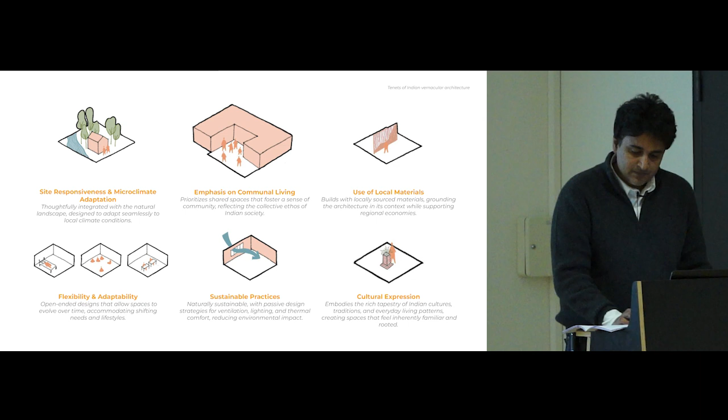Just to encapsulate this, we looked at the vernacular architecture of India, and one finds commonalities. The way one approaches vernacular architecture is through site-responsive and microclimatic adaptation, emphasis on communal living, use of local materials, flexibility and adaptability, sustainable practices, and cultural expression.

To consolidate all these ideas into one space that is an identity of Indian architecture, there's the courtyard. The courtyard in Indian architecture is much more than a structural element; it is the beating heart of the home, an inside-out city, what I would call it. The central space draws life inward, where the walls embrace and protect, creating a world within the world, a sacred enclosure that opens to the sky. In these open cores, architecture becomes poetry, where each courtyard is a canvas for the play of light, air, and life itself—a timeless symbol of shelter, community, and the intimate bond between people and place.

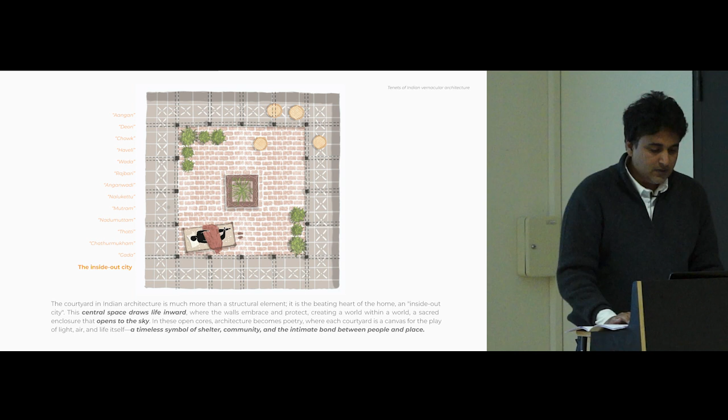As you see in India, the courtyard is termed with different terminologies—some call it an aangan, a chowk, a wada, an anganwadi—and that varies because of different geographies and different cultures set in those geographies.

In India, the common Indian aspires to desire their own house. It holds deep cultural and emotional significance in a rapidly developing yet complex economy. Homeownership is more than a transaction, it is a life milestone. A house in one's own name symbolizes not just financial success, but personal triumph, making the moment one feels they have truly made it.

A home in India embodies far more than just physical shelter. It stands as a sanctuary of comfort, a testament to long-sought stability, and a visible marker of social achievement. For many, it is the culmination of years of relentless hard work, sacrifice, and aspiration.

It represents not only the fulfillment of individual dreams, but also the collective hopes of family and future generations. But the truth is not so great. So when the average Indian embarks on the journey of finding a home filled with aspirations of comfort and fulfillment, they're often confronted with a stark reality.

Cramped matchbox-sized apartments are the norm, offering views of not more than adjacent buildings, often located in poorly developed areas with limited access to essential amenities. And these buildings are often nothing more than repetitive, soulless structures designed with no greater purpose than to provide a basic roof over one's head.

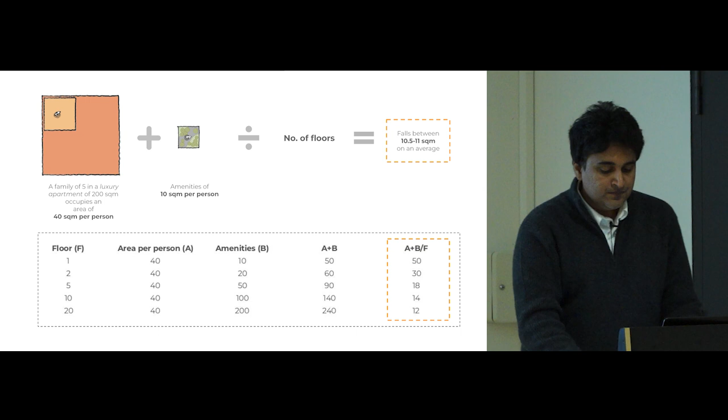So regardless of the size of the house, if it's 25 square meters or 200 square meters, the curve flattens between 10.5 to 11 square meters per person. So that is the standard that we thought could be applied when we start planning, like how many people could inhabit a particular site.

So therefore, for a site of 10,000 square meters, the maximum population will be 10,000 by 10, that is 1,000 people or 200 families. So this is the master plan of the affordable housing where we finished one building, and the second building is yet to get built.

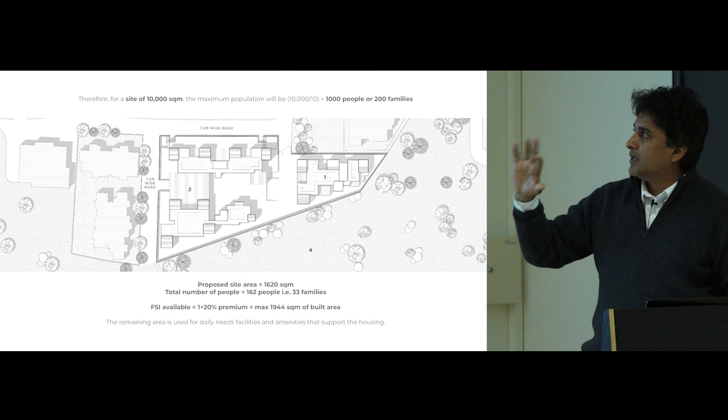But as a formula, we applied it to this site and said we can have a maximum of 33 families living in this site, and the remaining area we can use for open spaces, amenities, and so on.

The next framework is space. Space is the most valuable and costly element in construction, making it essential that every square meter is utilized with precision and purpose. Efficient and thoughtful use of space ensures both functionality and value, maximizing the potential of every area within a structure.

So when we started looking at space, the constant question was how do we arrive at a form that is more economical. We started looking at the basic attributes of a form, like the area and perimeter, to see how that could give us a solution for an economical form. Comparing a square and a rectangle enclosing the same area, we derived that a square requires a lesser perimeter for construction, making it a more economical form. So that's why we thought a square can give us a more affordable form in terms of construction.

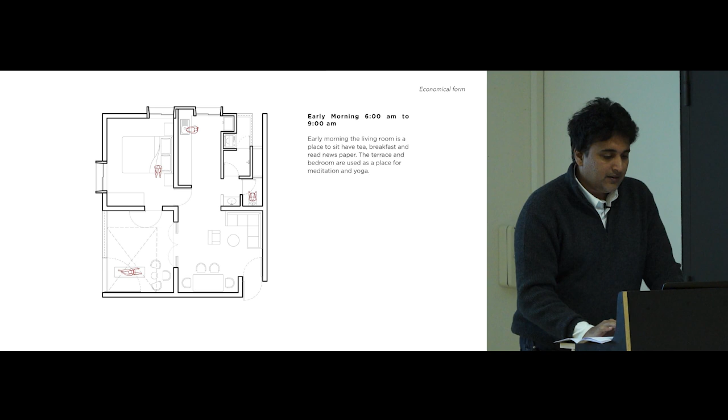We then started analyzing how this single unit can be dynamic in terms of its usage, at different times of the day. In the early morning, the living room is a place to sit, have tea, breakfast, and read the newspaper. The terrace and bedroom are used as space for meditation and yoga. These are based on Indian lifestyle patterns, what people aspire for.

From morning 9 to 12, the living room along with the terrace is used as a study area where one can sit, write, and think. In the afternoon, the spaces are effectively used as sleeping spaces, and then as dining space during lunch and dinner. In the evening, the living room is used for meeting family and friends, and the terrace for kids to play. These spaces become greatly active during gatherings and festivals.

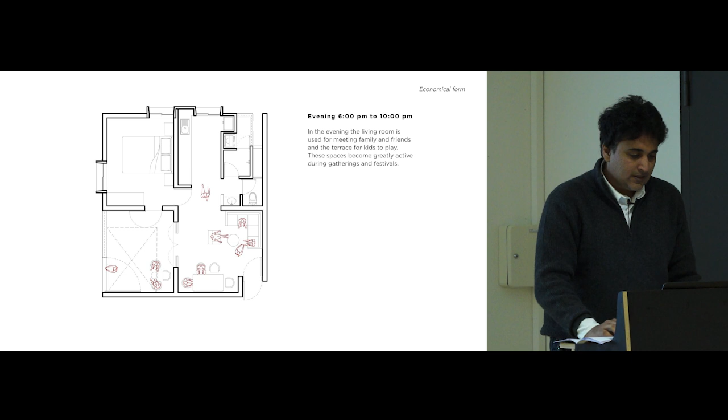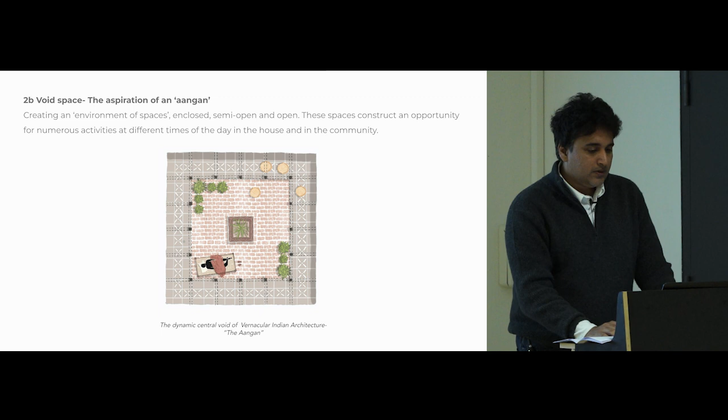So this dynamism in space came through the architecture of the courtyard, and how it is used effectively at different times of the day. This is the aspiration of many Indian families, that they would aspire to have a house that is so dynamic in terms of its usage.

The void spaces generate these courtyard typologies that one can look at. But based on the activity and living patterns, the L-shaped typology is the one we have used for this particular project.

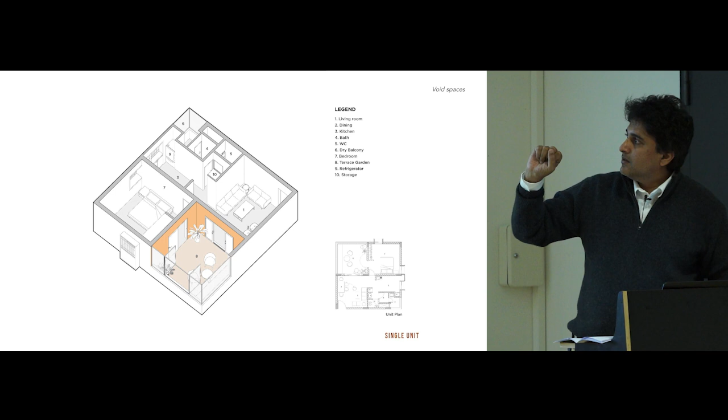This is the L-shaped construct around the terrace garden. The terrace garden effectively performs more like a passive light and ventilation device, which ventilates the rooms on either side. These are some sectional diagrams that give you an understanding of how the sun enters the rooms during the equinox and solstice.

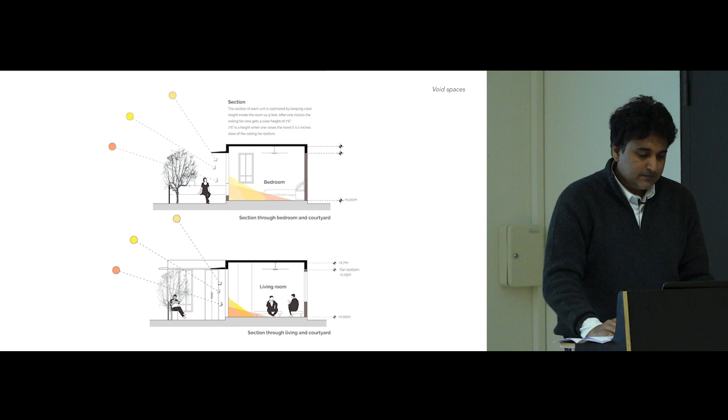This can be seen inside the units that are built, and the space then blends seamlessly between the inside and the outside. These L-shaped units are arranged in a plan where the open space interlocks with the neighboring units, increasing the possibility of expansion and incrementality between the two. This is the floor plan of the apartment, where you can see the open spaces interlocking with the neighboring apartment, and one can even connect to that apartment through the open spaces.

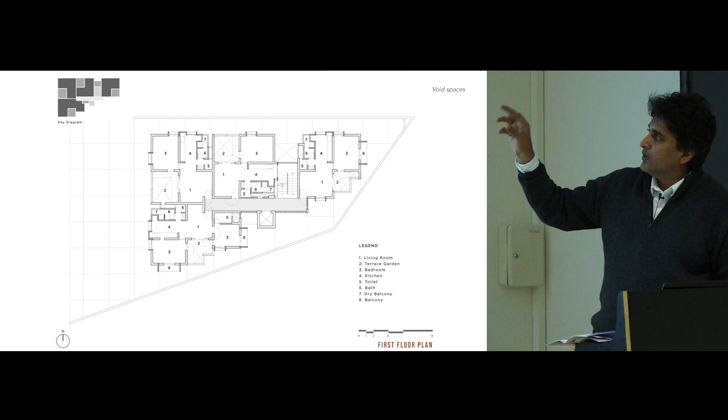This diagram is further translated into a floor plan with proper dimensions. As you see, all the service cores are very compact in each unit, forming the kitchen and toilet cores, while the rooms are pretty much open, overlooking onto the terrace. The new floor plan is stacked upon one another, consisting of 13 single bedroom units and 3 two-bedroom units.

I feel this diagram is very scientific in the sense it consists of highly efficient living patterns of a single unit that populates itself to form a community of open, semi-open, and enclosed spaces for use at different times of the day.

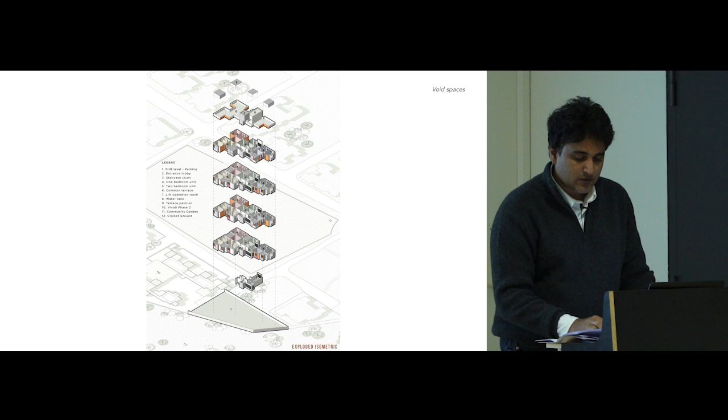The central challenge in housing lies in creating spaces that are both suitable and evoke a true sense of home, places that feel personal and embody individual identity. Architecture must balance adaptability to serve a diverse, often anonymous clientele. This can be accomplished by offering a flexible kit of parts that allow for various permutations and combinations, enabling space to evolve and adapt over time to individual needs and personalization. This approach ensures the home remains dynamic, shaped by its inhabitants.

So going ahead, we looked at the idea of the space and how it can be used dynamically, and the second attribute was the kit of parts that can add value to the space. The first is the ambiguity of usage, the open plan, which functions based on different times of the day with different activity patterns. Then there is the temporality in space with movable partitions, climate controls, add-on spaces, add-in spaces, and the personalization of spaces.

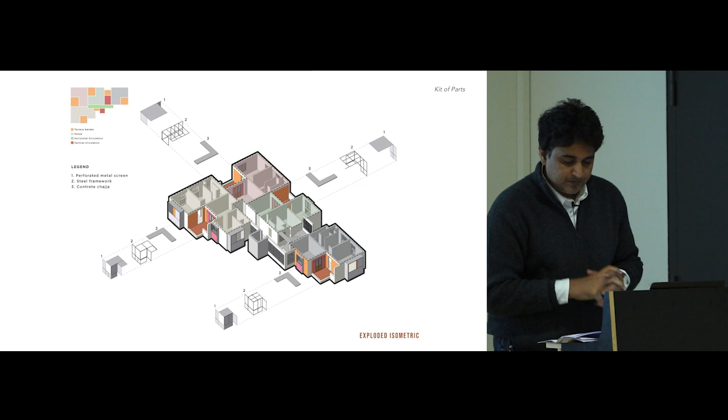The first set is the windows, which form the major design language of the facade. These are categorized into 6 types. Type 1 is a double box window for kitchen and bedroom, and the box below is a place where one can keep the outdoor unit of the AC. The other two are full height windows which open into the living room with a railing.

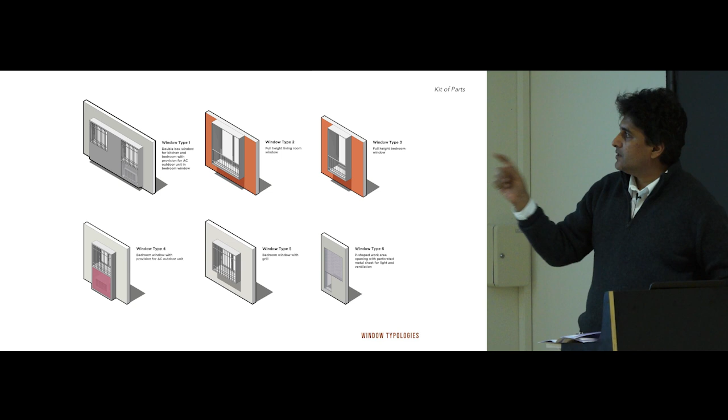Type 4 is again a bedroom window with a provision for AC outdoor unit. Type 5 is a normal window which can be attached to any room without an air conditioner outdoor unit box. The last type is a P-shaped unit along the service duct, used for accessing the service ducts.

I'd like to show you what went into making these windows possible on site. We went through a series of working drawings that would set up these windows in concrete. Later, the exercise was only to get the sliding window fixtures and put them in place. If you see the edge detail, it's an L-shaped notch that receives the window grill.

Window grills are a thing in India, because no client will want their houses without window grills. Yeah, it's kind of a safety parameter, can't help it. I mean, you'd like to design houses without grills, but I think it's not possible.

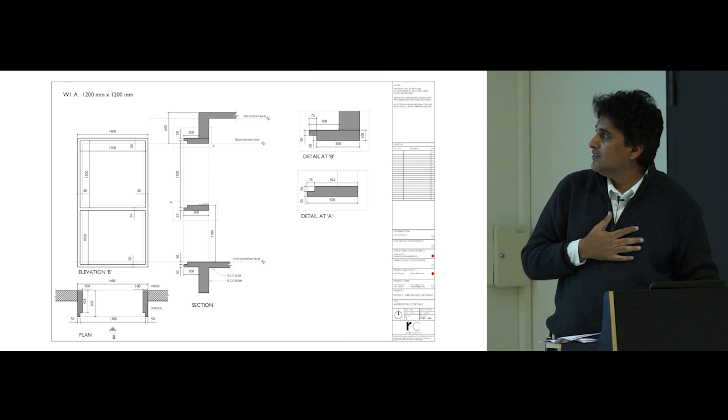Then you see this other window type which has a box below, primarily designed to keep the outdoor unit. It should not stick on the facade. In India, if you visit, you'll see a lot of buildings having AC outdoor unit boxes on their facades just hanging there. We didn't want that to happen, so we have this detail where all the outdoor unit boxes are taken care of.

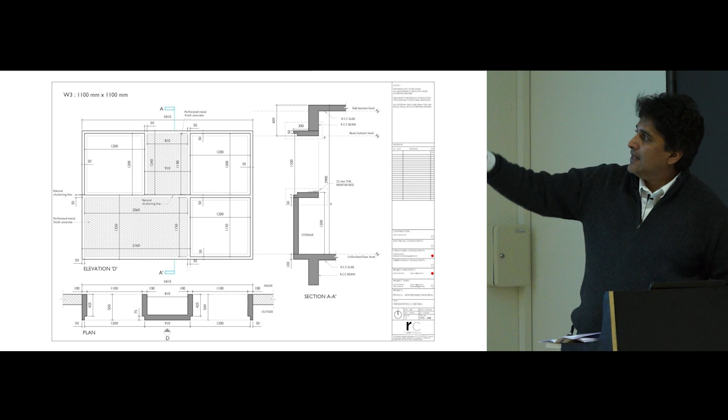This is a combination window between a bedroom and a kitchen. The right side is the bedroom, and on the left we have the kitchen window, which has an L-shaped storage that I can use as storage from the kitchen.

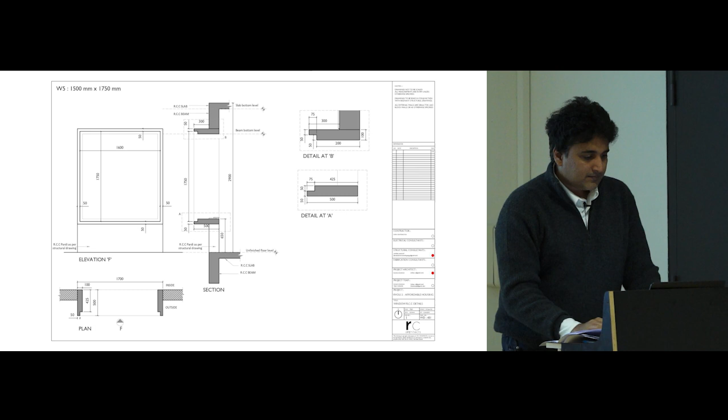And then these are again these long windows that open into the living room or also open outside on the view. Again, a long window with a wider dimension.

So that was the one set of kit of parts. And then these are the concrete screens that we customized, and these screens are primarily to seal the common areas, the passages and the staircase landings and so on. So we have 3 types for this - type A, B and C.

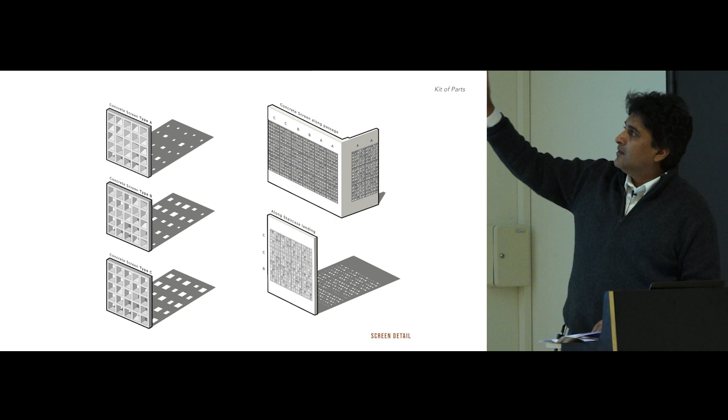So basically type A has more of the smaller openings and less of larger openings. B has a combination of both, and these are the working drawings that we produce, and you can see the section below of how they modulate.

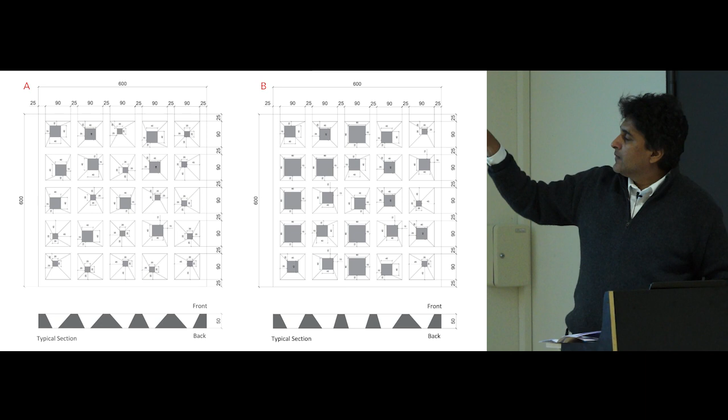And C has a lot of bigger size openings. The reason to do this was based on the direction from where the rain comes, or based on the direction of the sunlight. We could modulate these panels and create the openness as we desire. And the section gives you an idea of how they are stacked upon one another to form the screen.

And these were all locally manufactured. We did not go to any special factory. It was crafted in a small lane in Bombay where, I mean, you can see it is as primitive as it could be. So this man, he made these 3 molds by himself. It took him a little time to understand what he had to make, but once he understood, he made it so perfect that it was as good as the drawing.

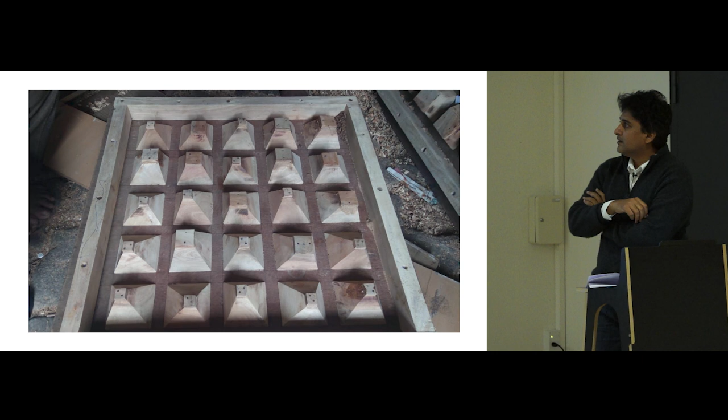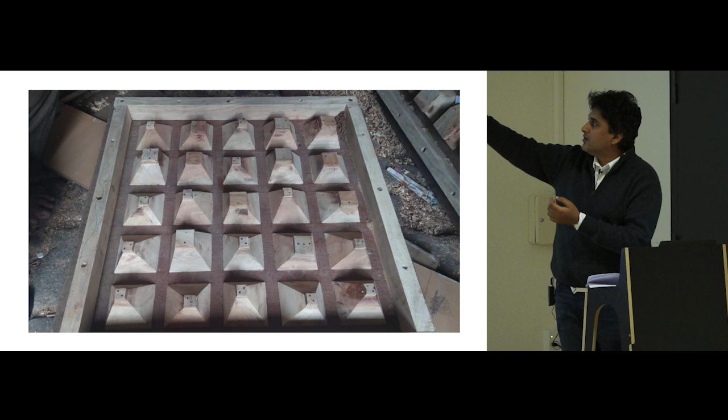So essentially how it works is, this is a wooden mold, and then the concrete is poured on this, and all the negative spaces get filled with concrete, and then you can manufacture any number of panels out of it. And then along with concrete, we have some metal rods going in the X and Y direction, which hold these panels together.

The next set is the balconies, which are attached to the edges, and these spaces are the extensions of the bedrooms. So at night, if one even wants to leave the bedroom door open and have this screen as a layer of protection, one will enjoy a nice breeze into the rooms. The climate in India is very different compared here - here we cannot do that because it's very cold. So this is completely contextual.

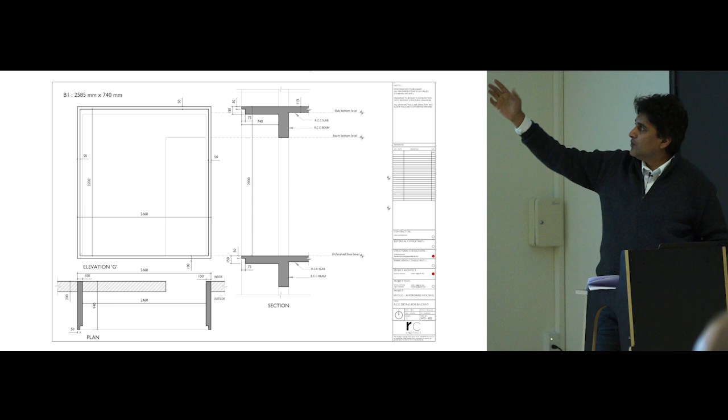So we have 2 types of balconies - one is wider, one is a little shorter. And that's how these elements appear. So they have an operable shutter, so one can even open it, leave it open for security, or it can be closed - it has many possibilities. And it also adds a great value to the facade.

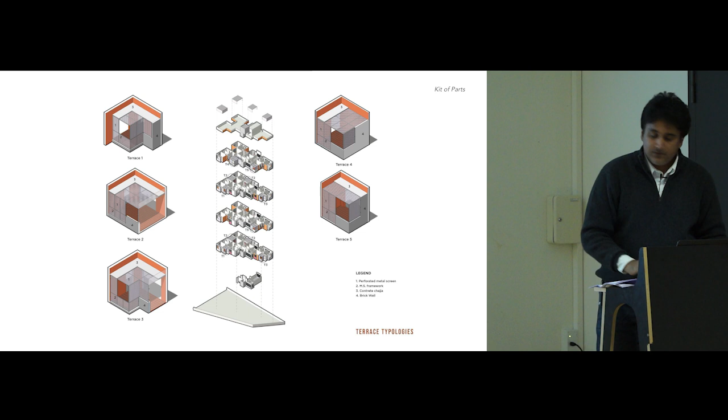And another kit of part are the terrace gardens. The terrace garden, they kind of form a great part of the facade. As you see, there are 5 types of terrace gardens, each with a different set of modulation of the perforated mesh. And each terrace has 1 square opening that allows you to open the shutter and look outside, and not feel as if you're in some sort of a cage.

Yeah, and those are those L-shaped terraces. The facade's metal shutters open and give you a view outside. Yeah, that's how the space looks like, from the inside it forms.

This is a very small space, must be around 10 feet by 10 feet, around 100 square feet. But for affordable housing, it adds a lot of value in terms of the size of the house, because all these houses are roughly 350 square feet, that is 35 square meters approximately. But this added space allows one to do a lot of permutations and combinations with this open space and use the indoor space accordingly based on different times of the day.

All the passive lighting and ventilation happens from here. The beauty of this plan is from the living room you can see this space, and from the other room also you see that space. So at a time you feel you have two of these spaces because you see the same space from two different spaces.

On the left-hand side you can see the terrace boxes coming out where the two girls are standing. We used a perforated mesh to enclose this, and the reason I took a detailed shot is the building surface is an opposite of what a mesh is—it's like an interlocking surface pattern with each other, and that's how the terrace appears to be. This kit of part adds great value to the facade, creating interesting volumes.

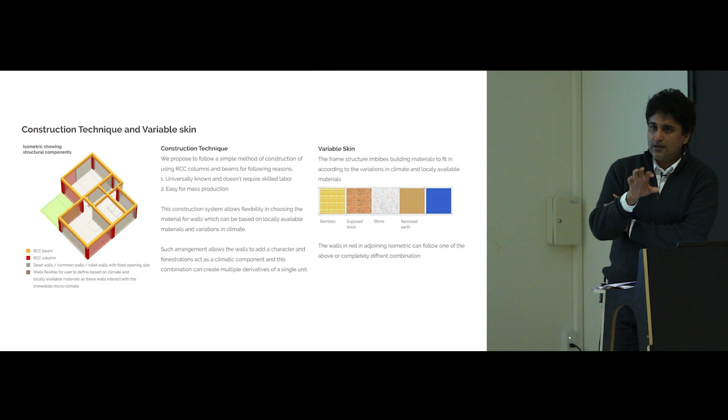The construction technique we used here is very simple—RCC beams and columns, but the flexibility is that one can use any material for the walls, for the infill, based on the context and locally available materials. The reason was this site was in a remote area, so we did not want to experiment with the construction method, something that the local labor could understand how to build. That was the primary guiding factor because one has to construct this building.

The third part of the framework is the circulation and the community space. This is very typical of Indian culture—in olden days, community spaces were used to reinforce the housing to create external connections, and they always embedded a sense of community. A child would never be alone at home.

A relative or neighbor was always around to help one another. The pungent smell of tasty food, chit-chatting through spaces, gathering on the common terrace during power cuts—all encourage one to partake in the everyday life of another in the colony.

Going ahead, I would like to show you a short film to reinforce the idea of community spaces. This is a film made by Urban Design Research Institute on affordable housing, built by the Maharashtra Housing and Area Development Authority. The kind of housing they build and what the city is going through—I think one would get to see through this short film.

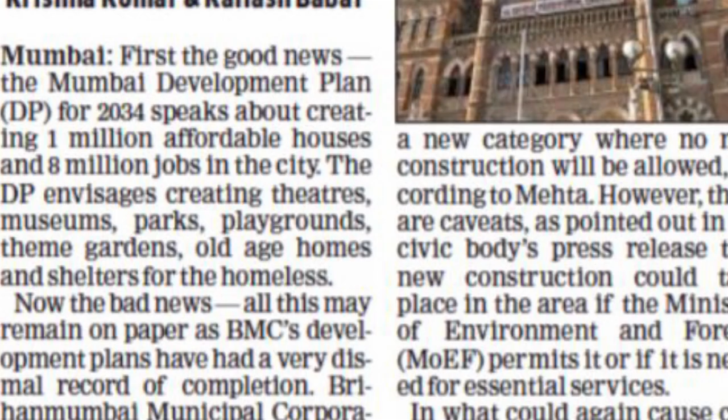The development plan for Greater Mumbai 2034 promises Mumbaikars 1 million houses, 8 million jobs, several open spaces and slum rehabilitation projects. But there is a wide gap between these highly aspirational figures and the reality on the ground, as there are no details on where these houses will be located, how the infrastructure will be, or how they will impact the quality of life.

Is it yet another scenario where, to secure the luxury of a few, the rest will be crammed into densely planned areas as a tick box exercise? This is the case, for example, with SRA developments, where the right to life of citizens is severely overlooked.

In SRA areas, 1 in 10 persons suffers from tuberculosis, and that person may further affect 15 people across the city. This is all thanks to the misleading development control regulations, and it won't be long before Mumbai is faced with an epidemic.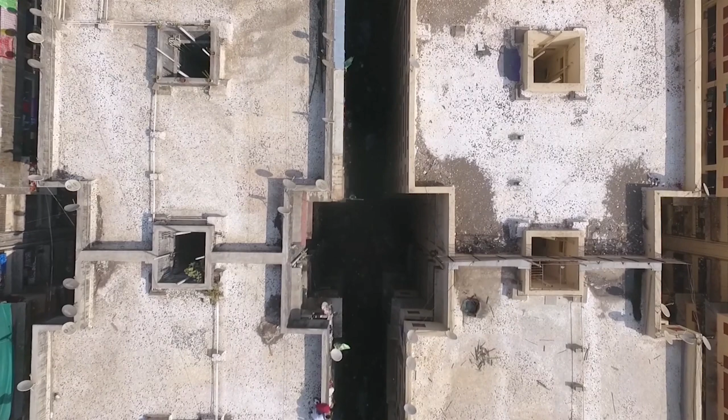High-density living conditions and a reduction of side margins create a heat island effect, which increases the temperature of the neighborhood, making it the perfect breeding environment for the bacteria which causes tuberculosis.

Along with SRA residents, all Mumbaikars are at high risk, given the vast mobility of working citizens across the city's transport networks. What the policymakers aren't telling us is that with such provisions, Mumbai will soon develop into a highly infectious spot for deadly TB.

While the mega plans for providing affordable housing seem like a big relief, in reality, with free housing comes free TB.

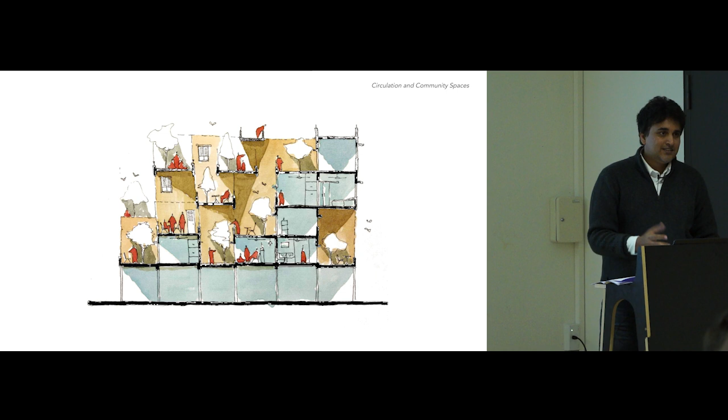So that was a great example of what happens when there are higher densities, lack of light and ventilation, and one compromises on open spaces.

I mean, this is a sketch—in fact, this is the first sketch that we did for this housing. We saw the movie afterwards, but naturally we inclined towards creating better spaces for people.

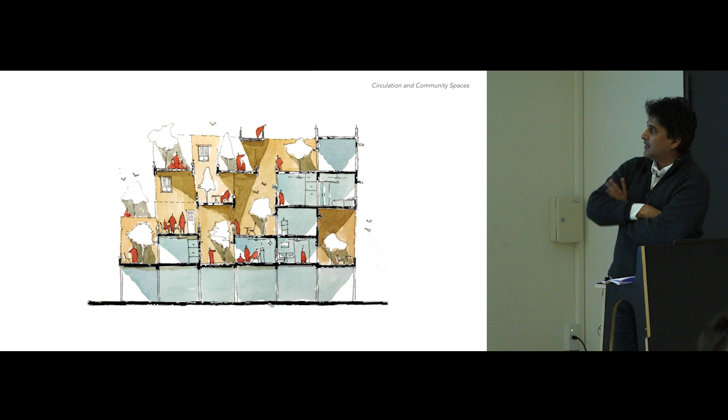So it was always about having community spaces where people can talk to each other, have good light and ventilation, and have a good communal life.

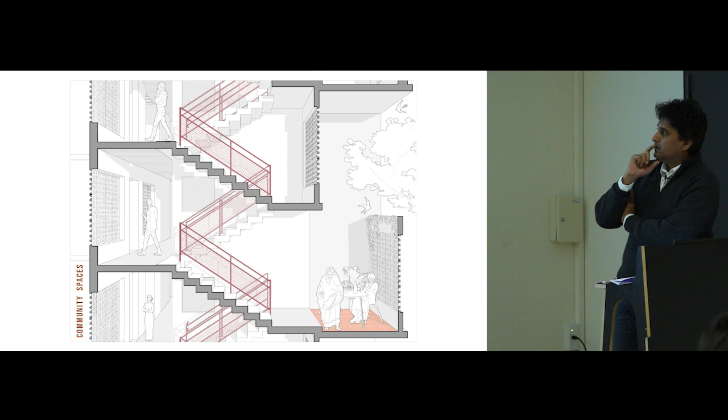And this is a detail of the community spaces—this is a sectional perspective of the project. It's not a big project, it's a very tight housing scheme, but what we wanted to do was have these community spaces scooped out wherever we could.

So here, if you see, the staircase landing is getting extended and becoming a space for senior citizens, or even a space for teenagers or youngsters or kids, or even a place where one can just sit and contemplate.

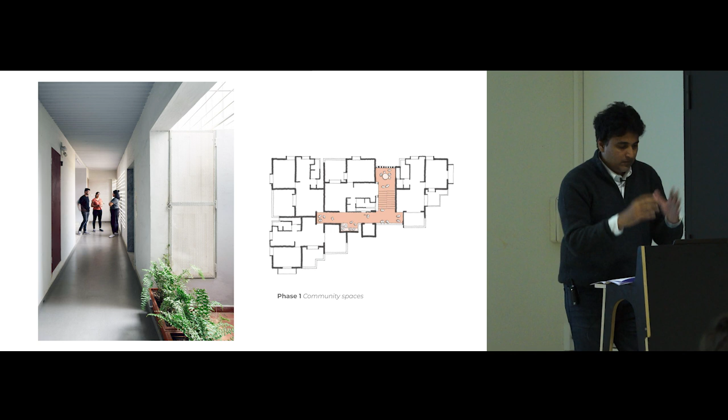And then, as you see, these are the community spaces marked in the drawing, and one can see how well lit and ventilated these spaces are. They're not big open spaces, but they allow for chance interactions.

That's where the staircase gets extended and becomes a place to sit. Or we have these pocket terraces along the pathway, which again allow for another layer of common space.

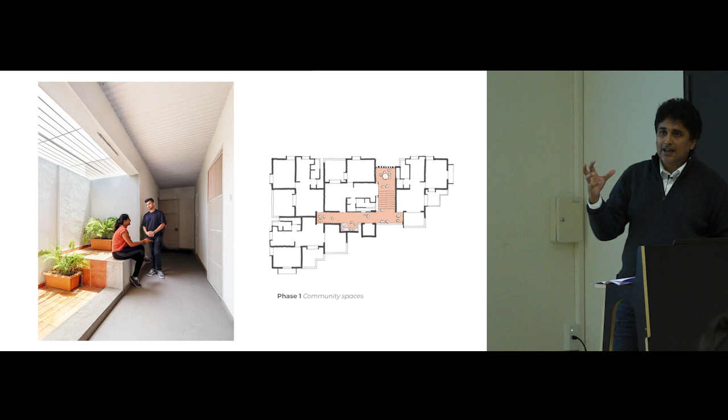And these spaces add value to the affordable housing because, as you see in that film, there's so much lack of accessibility to these kinds of resources that allows one to stay in such very cramped living conditions.

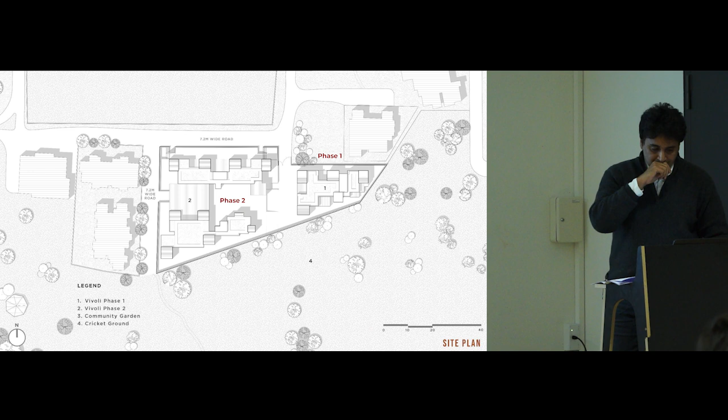So this was phase 1, and I would also like to show you some bits of phase 2 of what we are planning to do. So these are the 2 buildings. Phase 1 is sitting there, and we saw some real-time pictures of it. Phase 2 is yet to be constructed. They're separated by a common access road.

But before showing phase 2, I would like to touch on the aspect of amenities and how community spaces and amenities can go hand in hand.

Earlier I was talking about how the FSI can be subsidized and used for amenities. So amenities play a crucial role in housing, extending beyond convenience to significantly impact residents' quality of life, financial well-being, and sense of community. By offering essential services and facilities close to home, well-designed amenities help reduce daily expenses, promote social interaction, and create a supportive living environment. Moreover, accessible amenities encourage a healthier lifestyle, enhance property value, and contribute to long-term satisfaction and stability within residential spaces. In a sense, amenities are integral to building a sustainable, thriving community within a housing development.

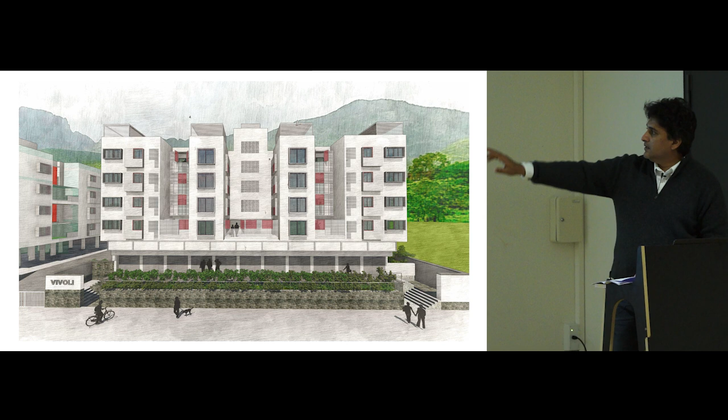So the idea of life cycle cost in low-cost housing, much like the concept practiced in sustainable architecture, goes beyond conventional metrics of construction cost savings, and instead adopts a holistic approach to low-cost housing across a building's entire lifespan and its potential within the urban fabric.

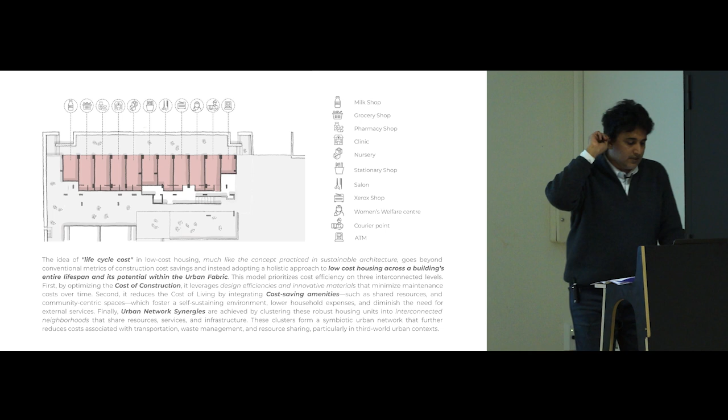This model prioritizes cost efficiency on 3 interconnected levels. First, by optimizing the cost of construction, it leverages design efficiencies and innovative materials that minimize maintenance cost over time. Second, it reduces the cost of living by integrating cost-saving amenities, such as shared resources and community-centric spaces, which foster a self-sustaining environment, lower household expenses, and diminish the need for external services.

Finally, urban network synergies are achieved by clustering these robust housing units into interconnected neighborhoods that share resources, services, and infrastructure. These clusters form a symbiotic urban network that further reduces cost associated with transportation, waste management, and resource sharing, particularly in the third world urban context.

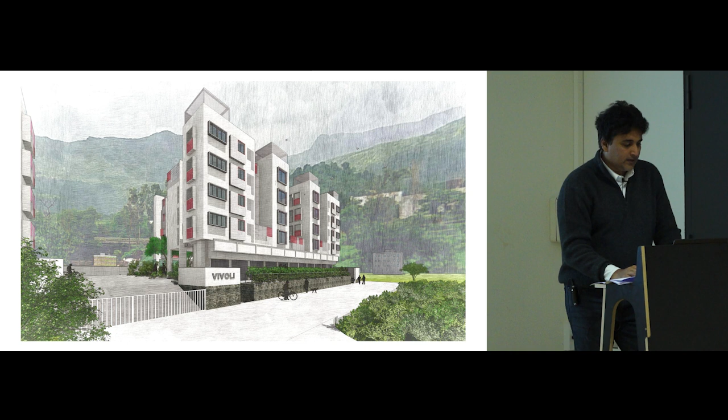And these are some montages of phase 2, and that's the community space where one enters on the ground, and you can see 2 staircase cores that go up. So here we have 2 of such buildings, like phase 1. And then again, we have these community spaces, which I call the inside-out city, derived from the courtyard.

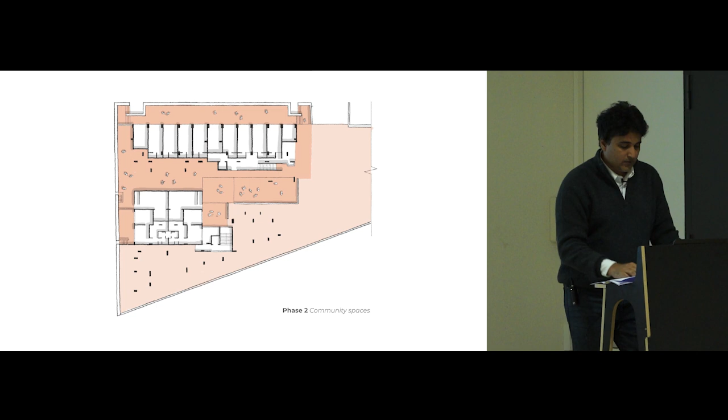So this is the ground floor of phase 2, where these are open spaces for communal life, completely filtered with light and landscape.

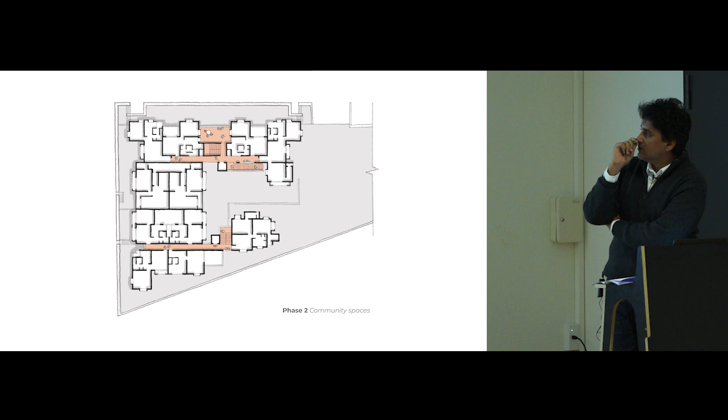Yes, and those are the 2 blocks in the front and the back. On the right-hand side is phase 1, and in the middle we have tucked in 2 bungalows, which are special designs. If someone wants to have a bungalow within this setting, one can easily buy those 2 units.

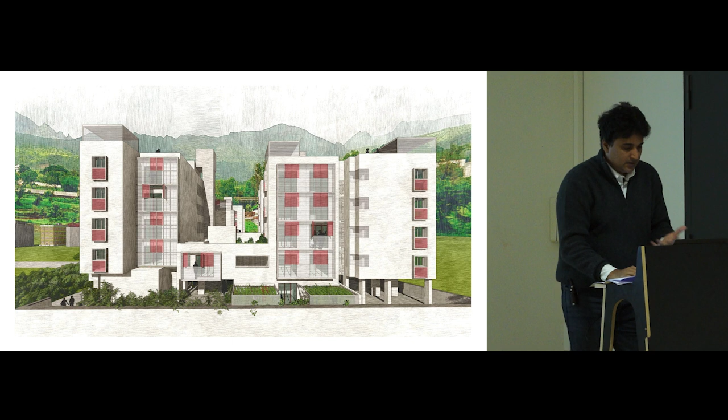And this is the facade on one side, but if you see, this open space goes right across from phase 2 to phase 1 - you see the phase 1 building on the back side.

So as a design aspect, we were trying to create this kind of network where the housing operates like a communication center, which connects with the amenities, which as well connects with the village farmer as well as with the core urban areas. The housing itself becomes a prototype where they can bring all these three components together.

And in India, at a certain level, ITC is doing that. So the farmers get more benefit from this kind of initiative, and they get a better price for their produce when they come in direct contact with the housing communities.

And then I'll take you through some construction images of how this project was realized.

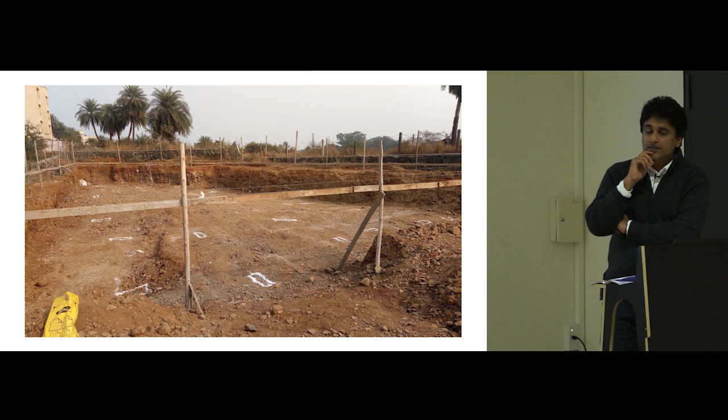This is then marked on the site, and this is a very traditional way of doing it. These days we have instruments like total station and other things which mark the coordinates on the site. But here, since the site was remote, we had to follow a particular method because the contractor did not have all those latest equipments. So essentially we have these wooden planks marked on all four sides, and the dimensions are marked on that.

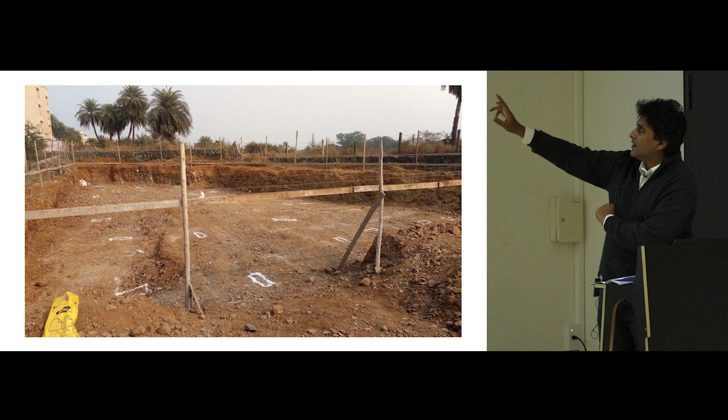If you see, there are these threads going in the X direction and the Y direction that give you the position of the columns, and that's how these columns are marked on the ground in chalk.

And yeah, that is the lift core where the man is standing. It's important to get this right because you don't have machines and you have to depend on people to mark that, and developing trust is the most important thing here. So we have to go several times and check: is it as per the drawing, is it correct, how has it been done.

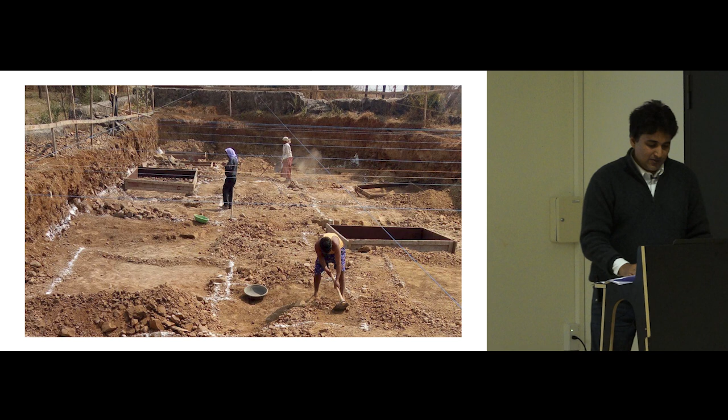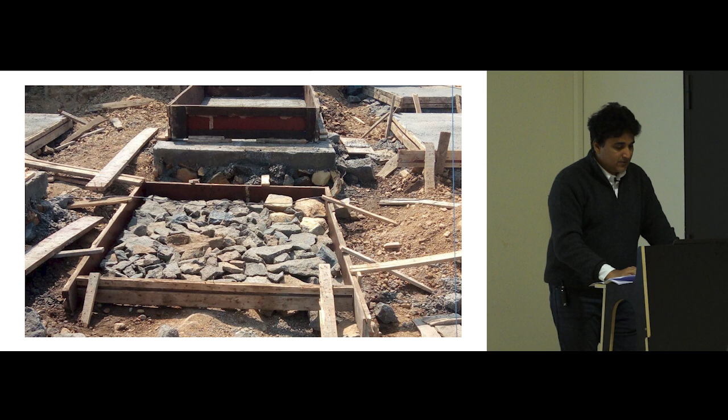Once the columns are identified in the correct location, they start digging the base of the foundation. They dig it and put a layer of PCC 3 to 4 inches thick. First the rubble soling is done, and then they put the layer - this is the kind of rubble soling that is done, and then they layer it with PCC to erect the footing.

So you have a number of platforms created on the ground inside the foundation, which allows the base for the columns.

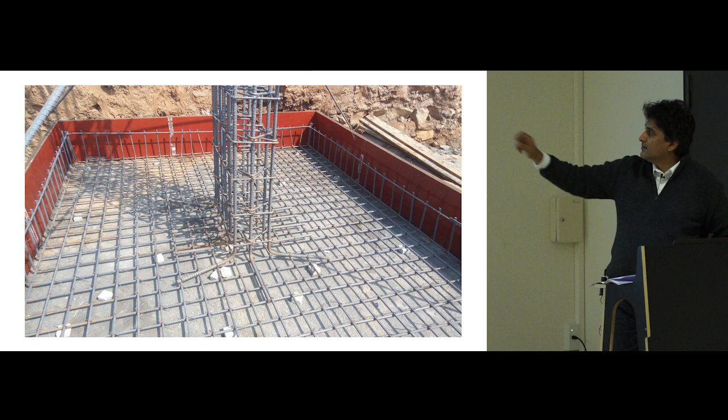And that's how it is tied and anchored with the stirrups. Then you have these small spacers that are kept so the concrete goes below it and settles down. It creates the cover for the footing.

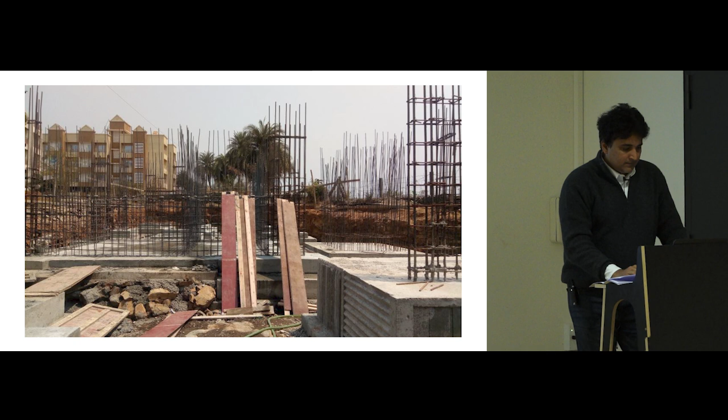An interesting thing we tried to do was create some mock-ups which we wanted to later use as finishes. Here we have used the corrugated concrete shuttering to understand how it will come out with the available resources, which we used later in the ceiling of the common areas.

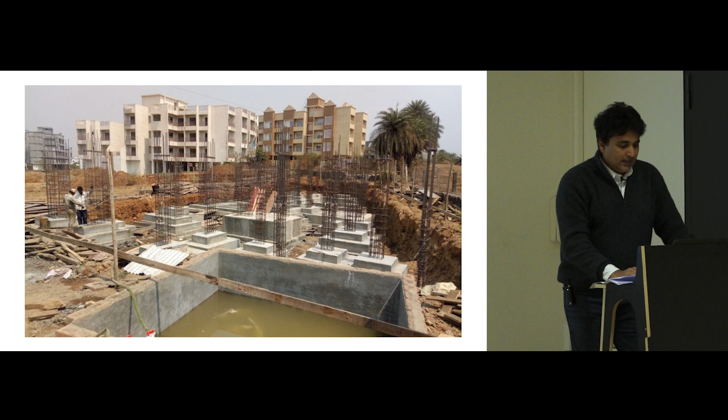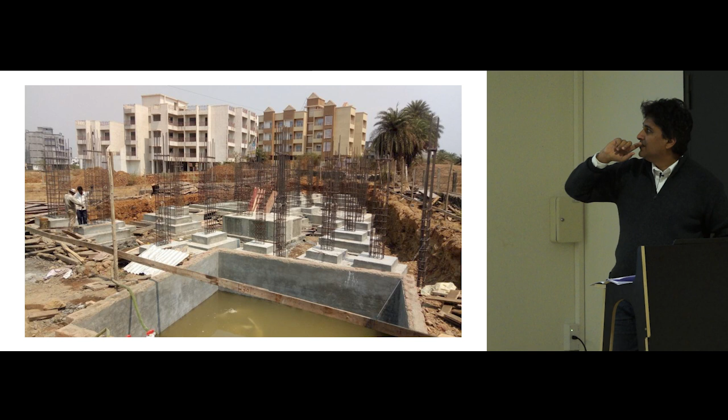That's how you see all the footings getting cast. Once this is done, you have a sigh of relief - then the building is going to get constructed the way it is, because from here onwards the project goes into an autopilot mode and starts building itself, and it's just a matter of releasing drawings at the correct time.

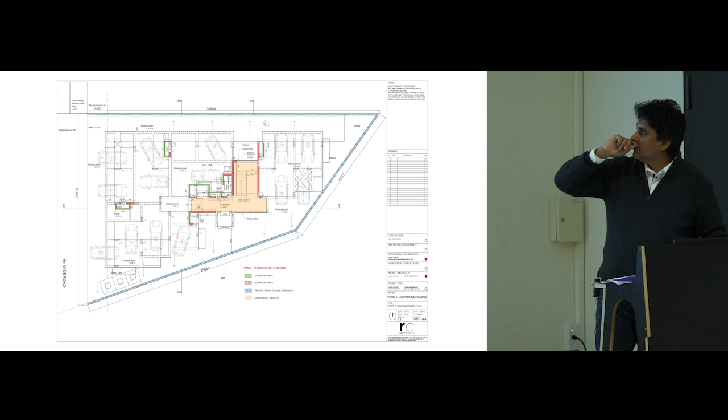This is another working drawing which shows the beam grid of the first floor, and the common areas are highlighted to give you a sense of orientation of where the staircase sits in reference to the building.

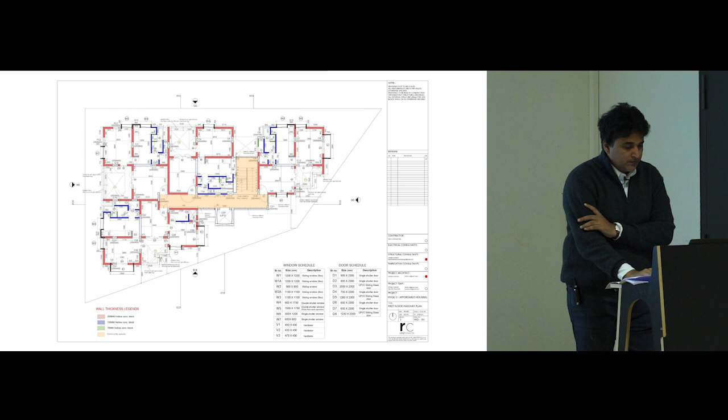And these are the typical floor drawings - the kind of working drawings we release on site, where the different wall thicknesses are marked in different colors for better understanding and alignments.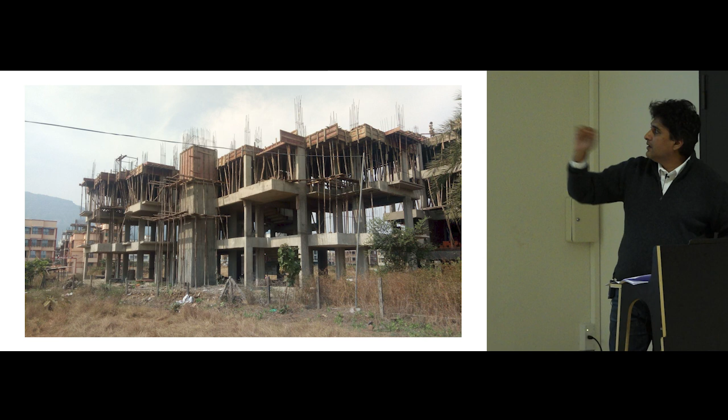And this is the facade of the other side, the triangular side, which kind of steps back and folds itself. That's the lift core, and then these are the other spaces.

As I said, the brickwork starts simultaneously as the RCC work goes above the second floor. So all the props are removed, and it makes space for them to inhabit the floor and do the brickwork.

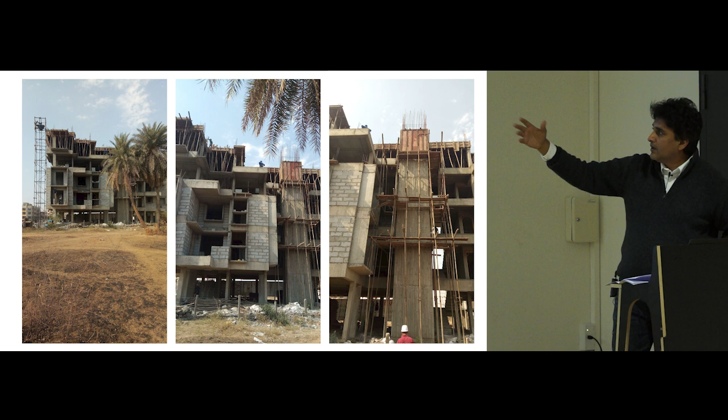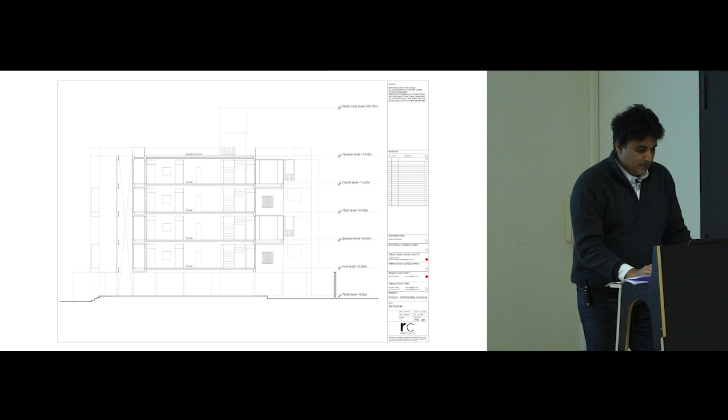And these are very, very basic drawings, but with all the floor levels and dimensions.

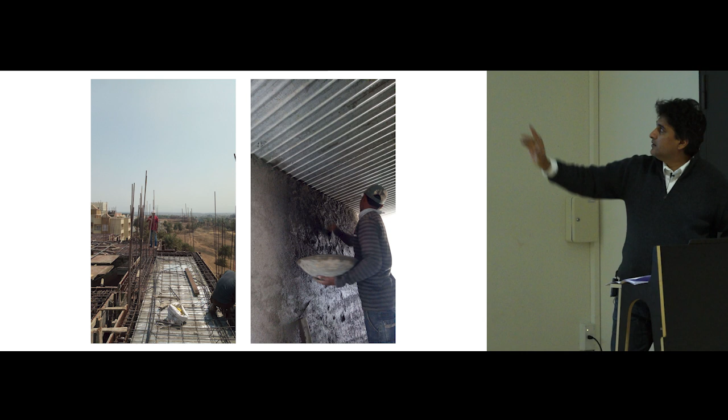So you see we have laid down the metal corrugated sheet, and after it is removed we get a corrugated pattern in the ceiling.

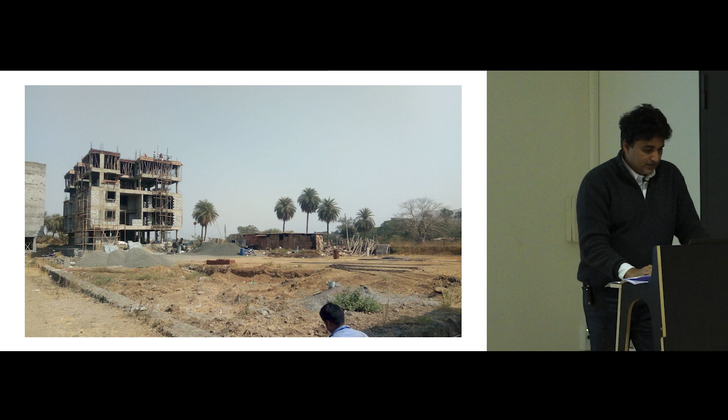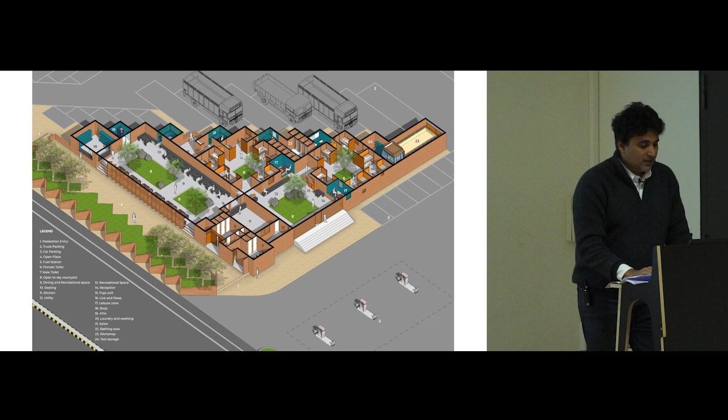Okay, and with the same attitude, we looked into a few more projects and a few more user groups, one of which was a prototype for truck drivers. I'll just show two slides, I won't extend too much into it. But the fact is this is also a kind of part of an affordable housing.

These prototypes are situated on the highway. A large part of export in India depends on the truck drivers. So we have created this infrastructure for them where they can pause for a while, relax, and use this space and then continue on their journey, because they drive for 22 hours at a stretch.

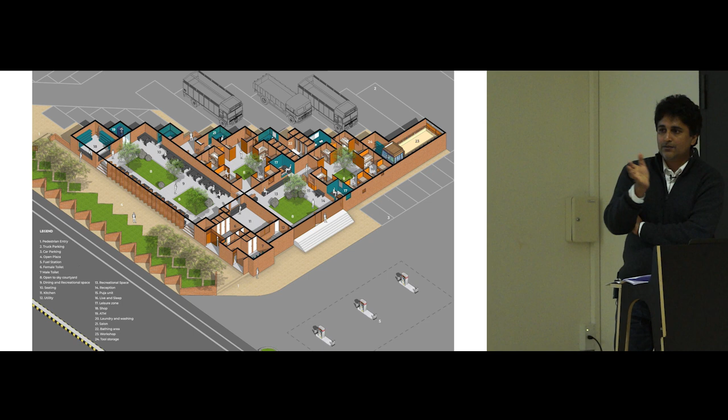As of today, there are no facilities in India for them, but I think the only facility is they park their truck somewhere, take rest, and behind that they have their own little pantry and kitchen, and then they kind of survive on that.

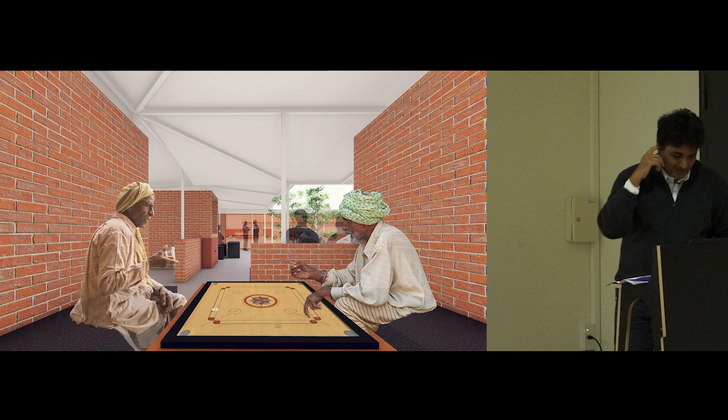And so these are the kind of spaces where they can share a cup of tea over a game of carrom maybe, and a housing facility for them, so overnight they can just relax and carry on their journey.

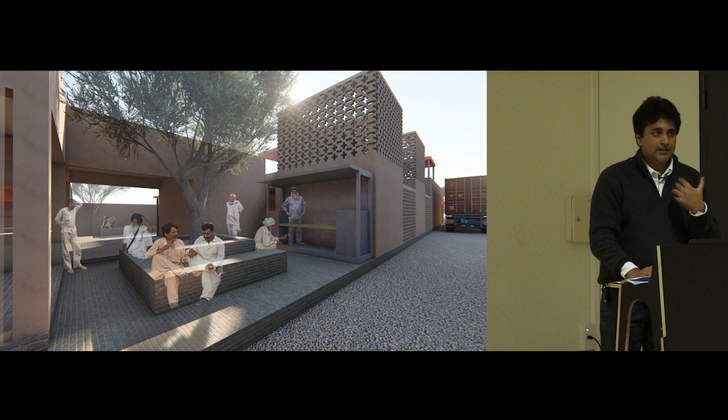And a similar type of incremental housing we proposed in Rajasthan, in Jaipur, with the same idea of how we can create affordable infrastructure for user groups who are not so privileged. At the same time, they are taken care of, they feel that they're respected, and they feel that they're part of this community living.

And after all this exercise, we realized that in India, yes, one aspect is creating affordable housing, but the housing is only affordable if it costs 3 times the annual salary of the head of the family. So that is the gist of this whole exercise. But yet, the people in India, they aspire for an angan, they aspire for the courtyard. Thank you.

Thank you so much, this was a really wonderful lecture. I have to say, so far we had very good lectures, but this was really, really top, in my opinion. It's amazing because you showed not just the labor of design, but also the labor of construction, and it's very rare to have such a thread, to see also construction as part of what we can call architecture. I mean, it sounds obvious, but I don't see many presentations that really add that layer.

I don't have actually any specific question.

There were two comments I really wanted to make. When I first saw your housing, the most catchy image is this facade, which is actually very beautiful. But your lecture completely contradicted my impression, because you seem to have designed everything from the inside out. The facade seems to be just the result of the living unit, and then the whole facade, the windows, a kind of kit of parts. I thought this was a very modernist approach, although when you see the project, you're impressed by the facade first.

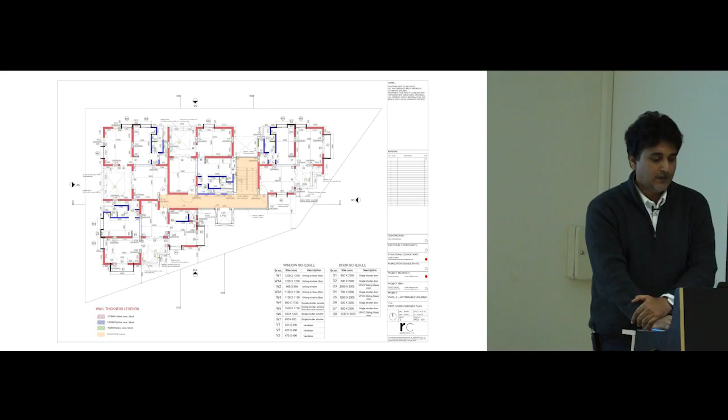I mean, I can go to that. Yeah, so the perimeter is a resultant of that. And a lot of the components that are coming out, those are window boxes or balcony boxes, which are not completely walled surfaces, they are just concrete projections.

Yeah, that's very beautiful to see in this drawing, that it's actually a rather calm plan, but what gives all the dentation are these elements that are not structural, so they're not so expensive. Yeah, they're projections mostly.